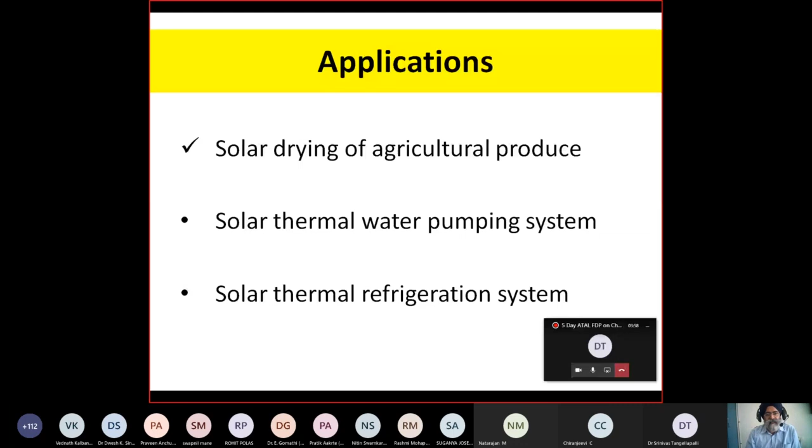Firstly, talking about the solar drying of agricultural produce. I would say it is a necessity to dry agricultural produce because of many factors, like there are very high post-harvest losses. After harvesting, a very large quantity of crop is lost because of improper handling during post-harvest operations, and that also causes food insecurity in Asia and African countries.

Food is also lost in developed countries, but in those countries the food loss is at the consumption stage. Whereas in developing or underdeveloped countries, it happens during post-harvest handling and processing. So that quantity loss of food is quite high, 1.3 billion tons as per the FAO.

The second reason we should dry agricultural produce is because of the ever-increasing population. The population is going to increase, and by 2050 we will need about 70% more food compared to what we are producing now. So there is a demand for more food as well, which can only be met if we are able to reduce the losses. That would be the better way, and there is a lot of scope for handling it better to reduce the losses.

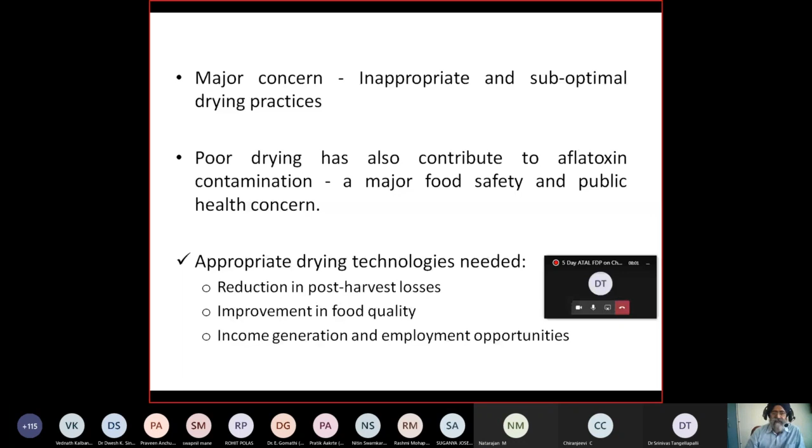So the technologies should be such that they can be used at the villages. Can you kindly go to the previous slide, sir? Just the previous slide. Yeah.

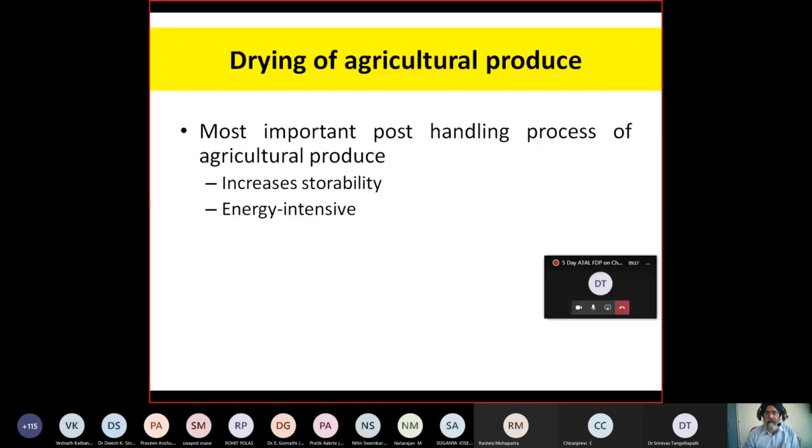Thank you. If the proper drying method is followed, if we process it properly, then we are able to reduce the moisture content of the drying product to a lower, desired value, generally less than 10%. Then its shelf life will increase.

We can store it for more than 1 year. That is the advantage to the processors and farmers, whoever processes the product, because mostly when there is a glut in the market, the price of the product is very low. The farmer can process the product and keep it with him, and since it now has a storage life of 1 year, when prices increase, he can sell the product. That is the advantage of drying.

But drying is a very energy intensive process, as is known to us. How drying is done is a simple method: we supply heat. In most drying processes, we supply heat, and the moisture of the drying product comes to the surface. The air in contact with the product carries the moisture away, the surrounding air moves away, and fresh air comes in. That is generally the drying process that occurs when we dry with the help of heat.

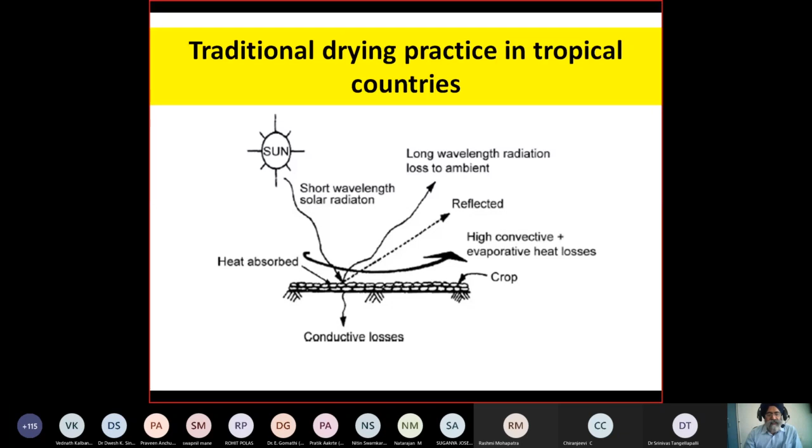Other unfavorable environmental parameters are there too, like dust getting added. Whenever the weather goes bad, we have to collect the produce, and then spread it again when the sun is shining. In the evening we have to collect the produce, and in the morning again spread it. So it is labor intensive as well.

But because of the cost, most farmers prefer open sun drying, since other methods are not available which are as economical, or close to that. The other dryers that we have are very costly.

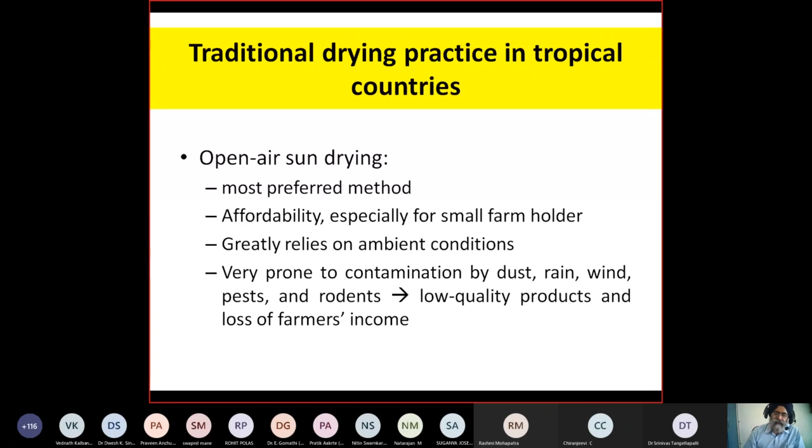The other drying methods we have are electric drying, vacuum drying, that can be done using a vacuum dryer as well. Biomass as a fuel can be used for drying the crops, and heat pump drying is there. All these methods require large amount of energy. They are energy intensive, that is one thing.

And the problem in the villages is that the electric supply is not reliable. That is one thing. Even if we can make a system that consumes lesser energy, the electric supply is very unreliable in the villages. So we will have to shift the system to a place in a city where the electric supply is reliable. That is one thing.

To have the system working at village, we need to go in for such a system, like a solar energy system, where the fuel is reaching every nook and corner of the country, in the villages itself. Only utilization has to be done. Fuel is there. The solar energy is there almost everywhere, at least in India.

And mainly the issue with other systems like electric, vacuum, biomass or heat pump is the availability issue. Because of that, we cannot go in that direction. But these are being done by the large commercial houses. They can do it at a particular place. They can ensure the availability. That can be done by them only. So solar is promising from that point of view, and it is available almost everywhere.

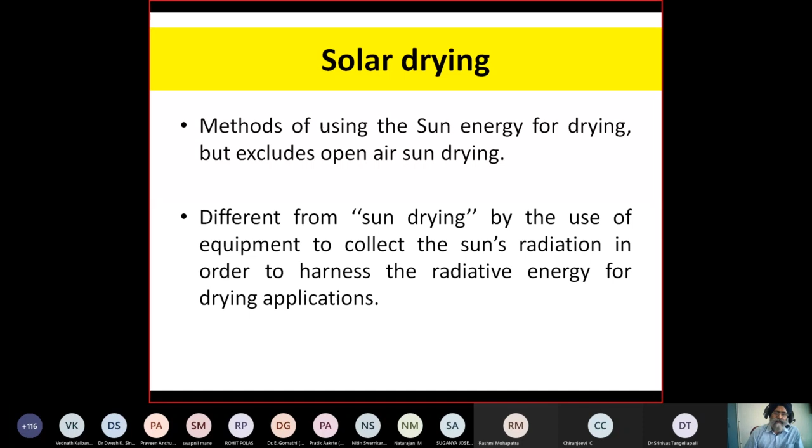It has certain advantages, very large advantages, you can say, as compared to open sun drying. It is faster, it is hygienic, it's healthier. These things are there because the dust and other impurities will not be added, and the shelf life of the dried product will be more because we can dry to a lower moisture content, because we can achieve a higher temperature in the solar dryer.

Product will be dried at a higher temperature, so the moisture content will be lower, so the shelf life will be more. And its operating cost as compared to the mechanized dryers, the electric or vacuum dryers, is lesser. So these are some of the advantages.

A very large amount of work has been done on solar dryers, and there are a number of technically proven designs. The potential is there, the requirement is there, but it is being used at very few locations. Where it has been developed, at that location it is being used. These have not been popularized. There are certain limiting factors, the extension activities, because of which they have not been popularized, because we have not educated the farmers about the use.

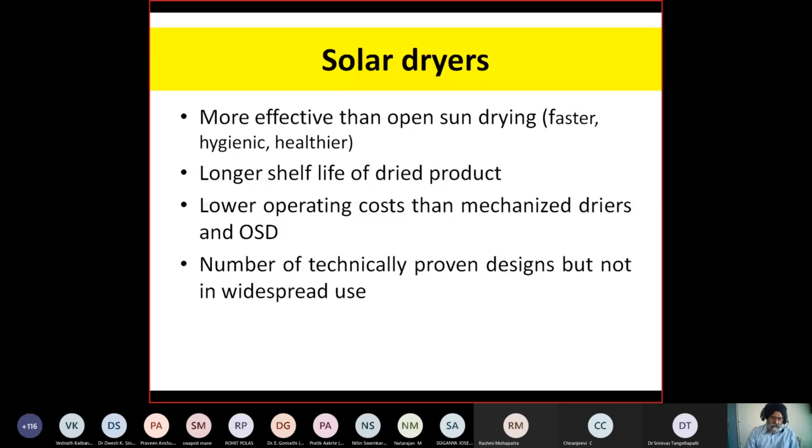And the allowable temperature is maximum up to 75 degrees centigrade, but mostly for fruits and vegetables it is between 50 and 70 degrees centigrade, and for grains it is slightly lesser. So the temperature required is up to 75 degrees centigrade, and this can be easily achieved with flat plate solar collectors. So flat plate collectors seem more suitable for use in solar dryers, because we can easily achieve the desired temperature with them.

And about the components of the solar dryer, basically we have two components. We need to have some arrangement to collect the solar radiation. That is the solar collector. And the other, we need the arrangement to utilize the collected energy.

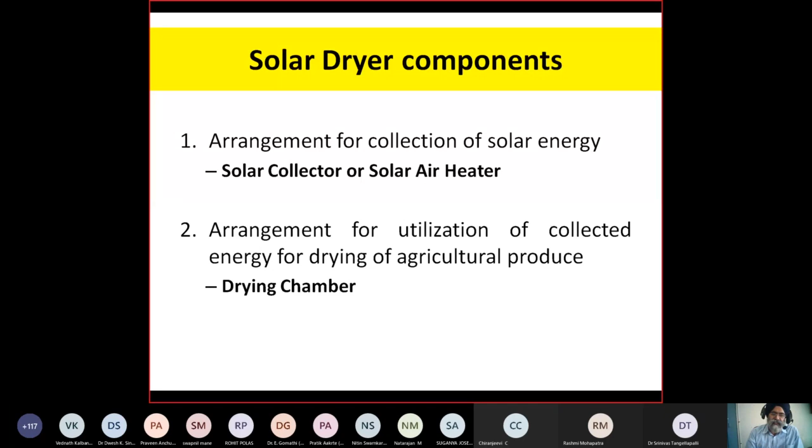So in the solar dryer, the main components are: we have to collect the solar energy and we have to utilize the collected energy for drying of agricultural produce. For the collection of solar energy, we have solar collectors, and for utilization of solar energy for drying, we have dehydration chambers or drying chambers. These are the two main components that would be there in all the drying systems. Additional components may be there, but these are the basic components.

And about the classification of solar dryers, the solar dryer can be classified in three ways. First, based on the collection and utilization of solar energy: how do we collect the energy and utilize that energy? Then the mode of heat transfer: how the collected heat is transferred from the absorber to the agricultural product. And third is the method of air movement, how the air moves.

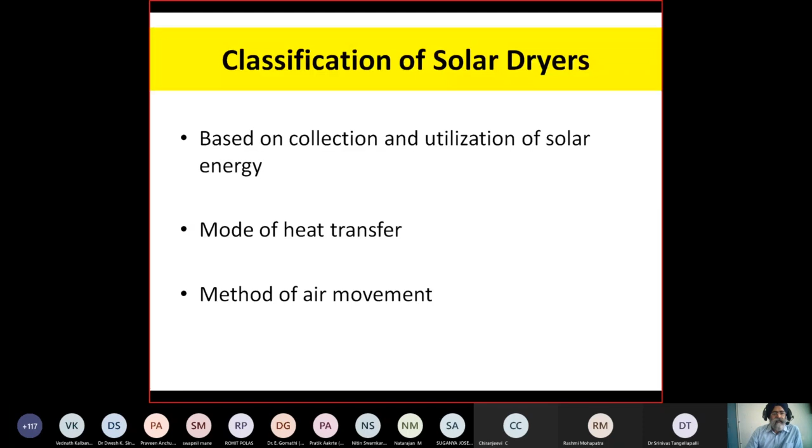Based on the three, first is based on collection and utilization of solar energy. We have seen the solar dryer has two main components, solar collector and drying chamber. And if the solar collector and drying chamber are combined together, then that system is called the integral type of system.

And the other possibility is we can keep them separate, solar collector and drying chamber. So the second possibility is solar collector and drying chamber are separate units. So that is a better unit that is called the distributed type. Here in this case, we can optimize both the units. Solar collector can be separately optimized and drying chamber can be separately optimized, and then they can be combined together. So we have two types based on collection and utilization of solar energy, integral type and distributed type.

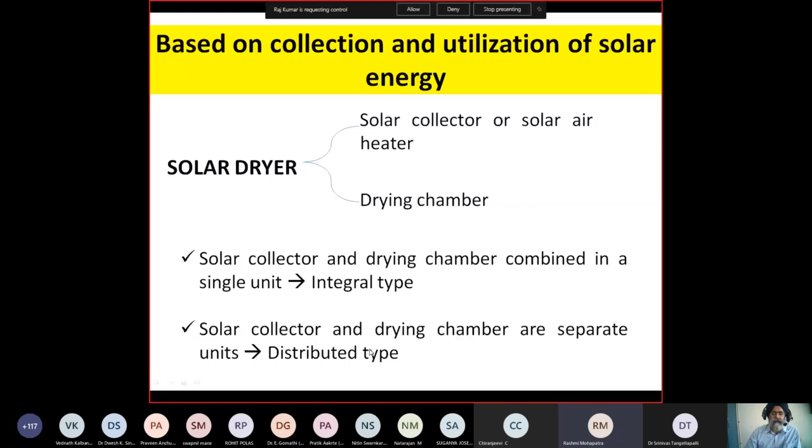Your slide is not visible. Yeah, it's showing. Right. The slide is visible. It's coming, sir. It's coming. Mode of heat transfer. Now we have mode of heat transfer. Is it visible? Yeah, sure?

Sorry. About the mode of heat transfer, we have three types of solar dryers. One is a direct solar dryer, other is indirect, and next we have a mixed mode solar dryer. In the direct solar dryer, the radiations are captured on the produce itself, directly utilized. The produce gets heated and the moisture is removed from the drying produce. And in the indirect solar dryer, the agricultural produce doesn't come in contact with the solar radiation. Hot air is utilized to dry the product. That is indirect utilization, indirect solar dryer. And in the mixed mode, it is a combination of both the indirect and direct mode.

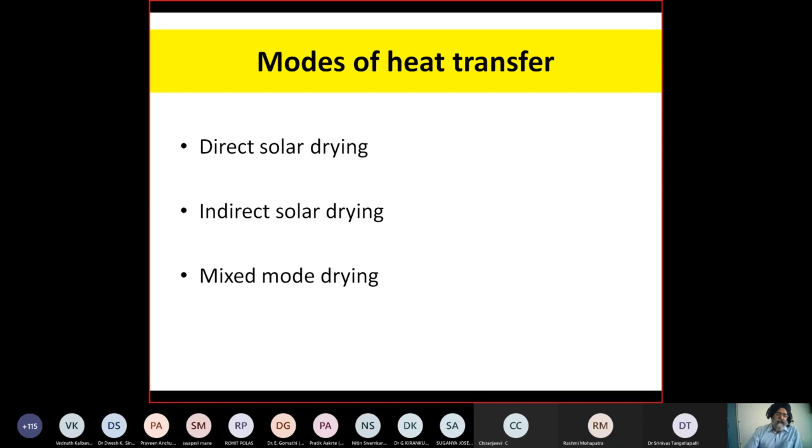And some of the points in its favor or against: it will be of small capacity, because we have to spread the produce and cover it. So the area required will be very large, and we can process a limited quantity of produce at a time. And discoloration of produce will be there. Most of you may have noticed, in the case of red chilies or fenugreek leaves that we call methi, leafy vegetables, if direct sunlight falls on them, their color is affected. But if we dry them under shade with hot air, no discoloration will be there.

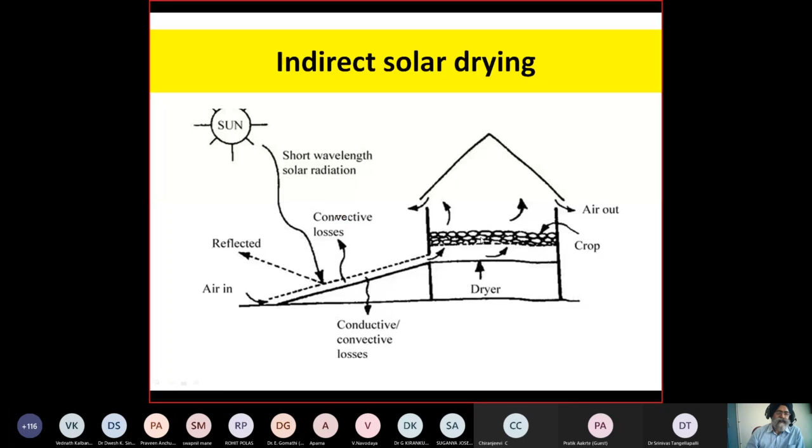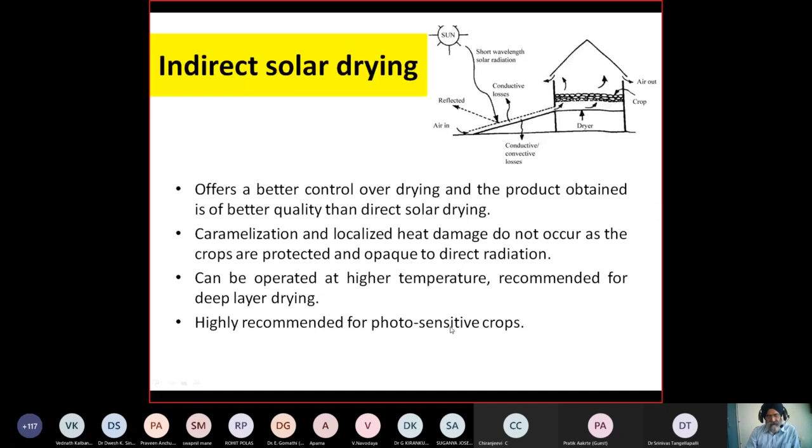And these are some of the points about the indirect solar dryer: it offers better control over the drying, and the product obtained is of better quality than direct solar drying. Localized heat damage does not occur as the crops are protected, and it can be operated at a higher temperature. We can have a large number of solar air heaters so that we get a higher temperature at the inlet to the drying chamber. And it is recommended for photosensitive products that I talked with you about, the red chilies and leafy vegetables. Those will be better dried in this case.

And about the mixed mode solar dryer, it combines the features of both direct and indirect solar dryers. This is a mixed mode solar dryer. Here we have a solar collector, and at the top we have a drying chamber. This is the drying chamber, and at the top of the drying chamber we have a transparent roof. So the product to be dried is placed here. It is getting heat from the solar air heater from the bottom in the form of hot air and directly from the solar radiation as well. So it is a mixed mode. We are getting drying through indirect as well as direct. The two modes are combined, so it becomes a mixed mode.

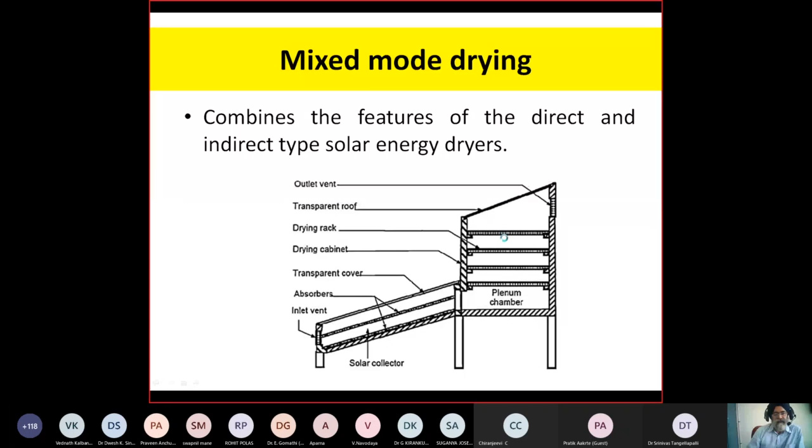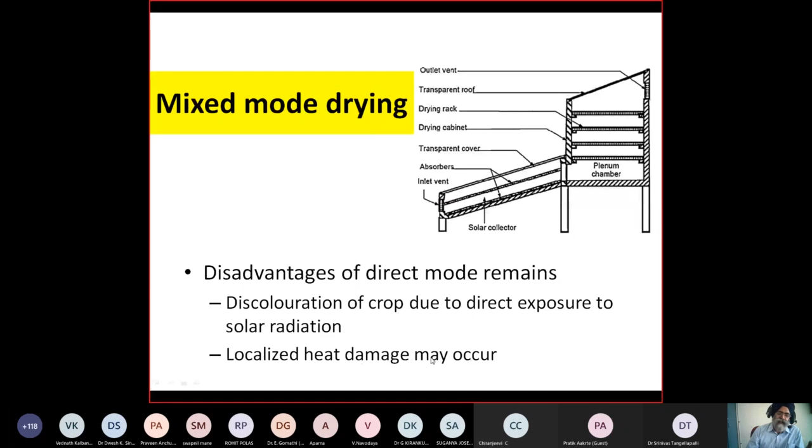Some of the disadvantages. The disadvantages of direct mode remain, like discoloration of crop due to direct exposure and localized heat damage; their extent will reduce, but they will remain. Next is the method of air movement. We can have the air movement through the solar collector and drying chamber naturally by buoyancy, or we make use of an air blower or a pump to force the air from the solar collector through the drying chamber. So these are the two types of dryers: natural airflow or forced airflow. These are also called passive solar dryer and active solar dryer.

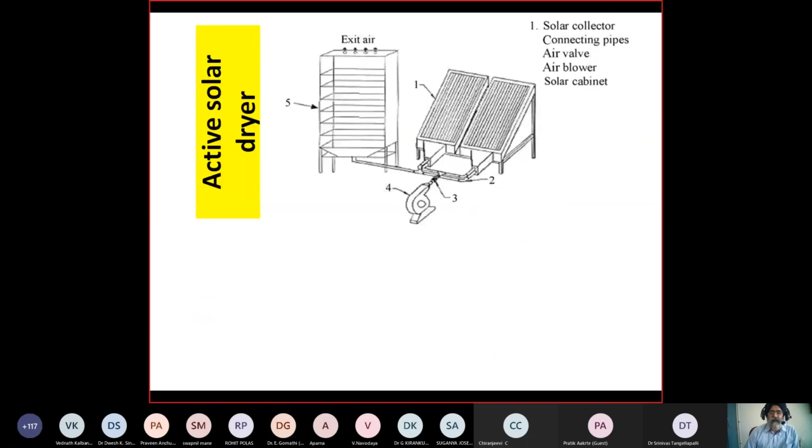And about the active solar dryer, we have to make use of a pump. Here we are making use of a pump and forcing the hot air from the solar collectors through the drying chamber. So this becomes a forced convection solar dryer or active solar dryer. So it can be used for large scale commercial drying.

Sir, one second, sir. Can you show us the previous slide? This one? Thank you, sir. Thank you. Should I? Thank you, sir. Thank you.

So this type of system can be made bigger because we can have a number of solar collectors. So a large amount of air can be heated if we collect a large amount of solar energy, and we can make this drying chamber bigger, or have a number of such drying chambers, and hot air can be supplied to all. So for large-scale commercial drying, active solar dryers are used.

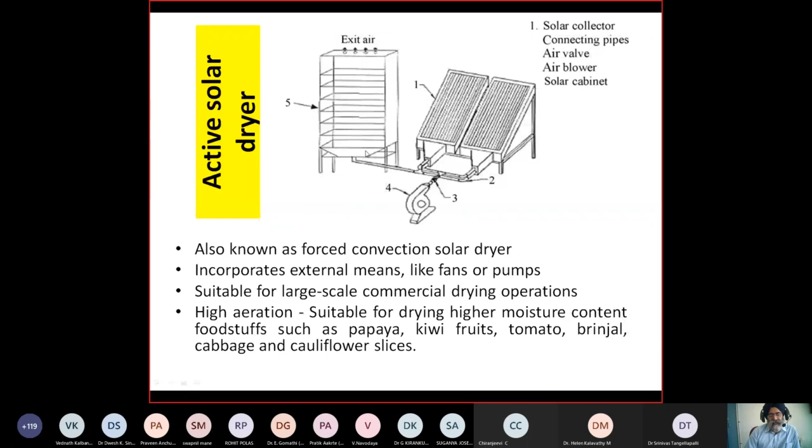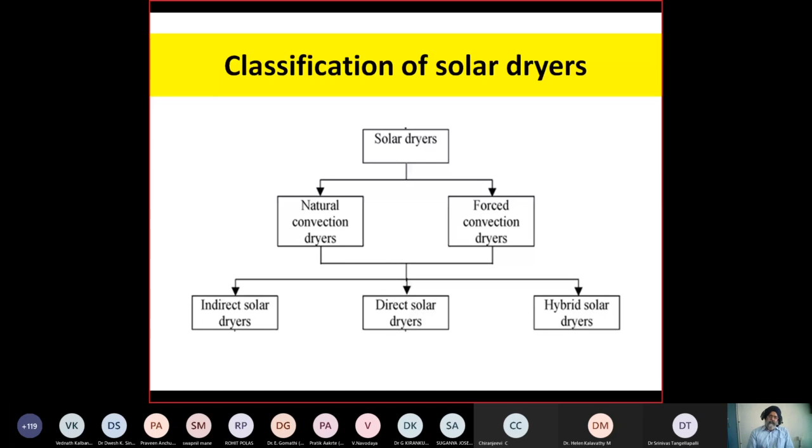So in the end, again, we see that solar dryers can be natural circulation and forced circulation. For natural circulation we can have direct solar drying, indirect solar drying, and mixed mode solar drying, and similarly for the forced convection solar dryer we can have all three, direct, indirect, or mixed mode solar dryers, that we will see in the coming slides as well. I will share with you some studies that have been carried out by people about the natural circulation solar dryer that we have seen.

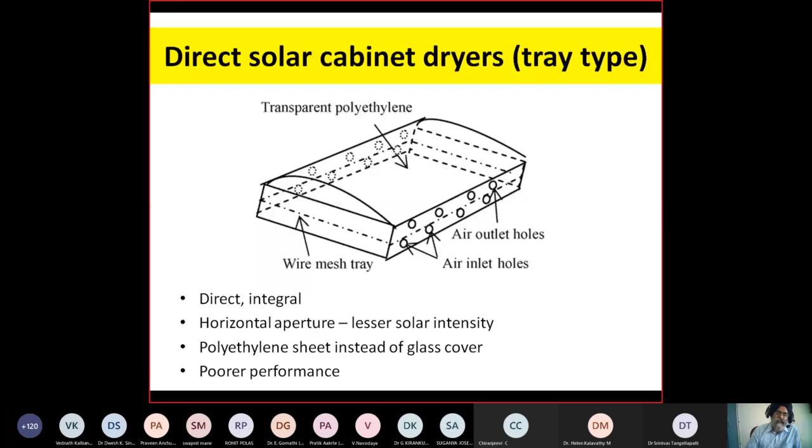Its cost will be less, but the performance at the same time will be poor. The other thing that is not in favor, like I discussed in the previous slide, is the horizontal aperture. So it will intercept a lesser amount of solar radiation. So that is the thing that is not in its favor.

And another system that has been reported is also similar to that. It is similar to a cabinet dryer. We have a tray here on which the product to be dried is placed. There is an opening at the bottom through which air goes in, and a chimney has been provided for air outlet. Because of the chimney, the flow of air will be more.

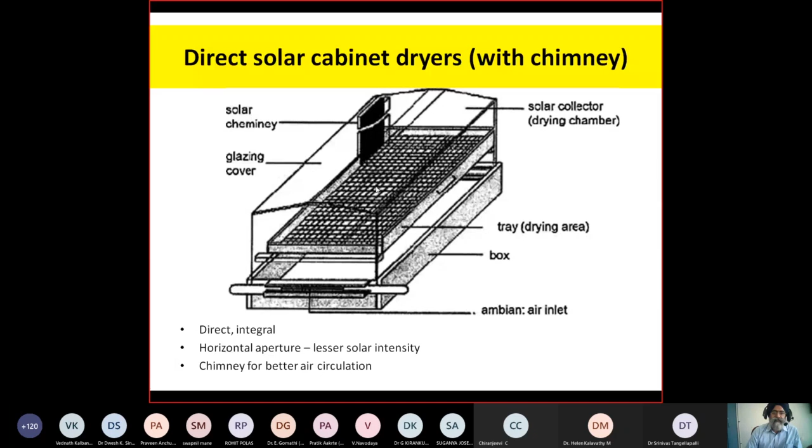So as compared to the earlier dryer, the airflow in this may be better. But again, here we have a horizontal aperture. That is one of the deficiencies that will cause lesser interception of solar radiation.

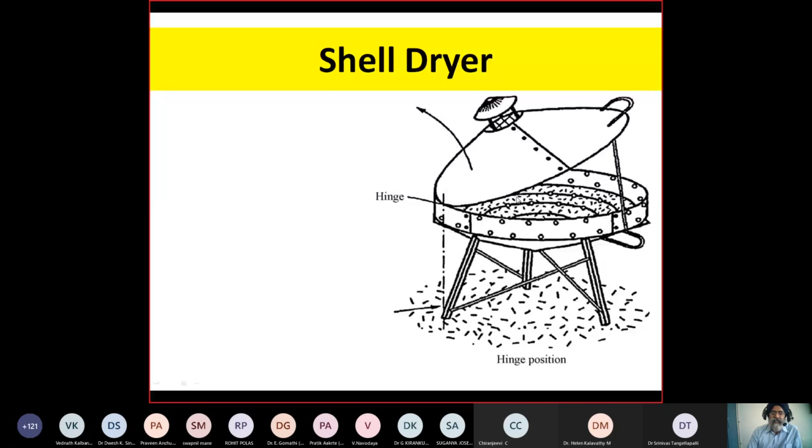And this is another dryer that is popular in African countries. That is a shell dryer. Here we have the top, which is metallic. This is openable. On this metallic top, the solar radiation is absorbed, and on the lower surface we have two cones. One is this cone, and the other is the inverted cone there, on which the product to be dried is placed.

By opening the top cover, we can place the product, and holes are provided on the sides, and at the center an opening is provided for air outlet. Air comes in through the side holes. But in this case, the absorber is at the top. So the hot air will cause the flow of air, but the heated absorber may not transfer the heat to the product placed in the drying chamber. But it will cause a better flow of air.

So this absorber is not being utilized in a proper way, you can say, and at the same time it is an unglazed absorber. It is exposed to wind as well, so the losses from the absorber will be high. So these are the points that are not in favor. So only aeration is happening in this dryer. But this is an indirect solar dryer, indirect and integral.

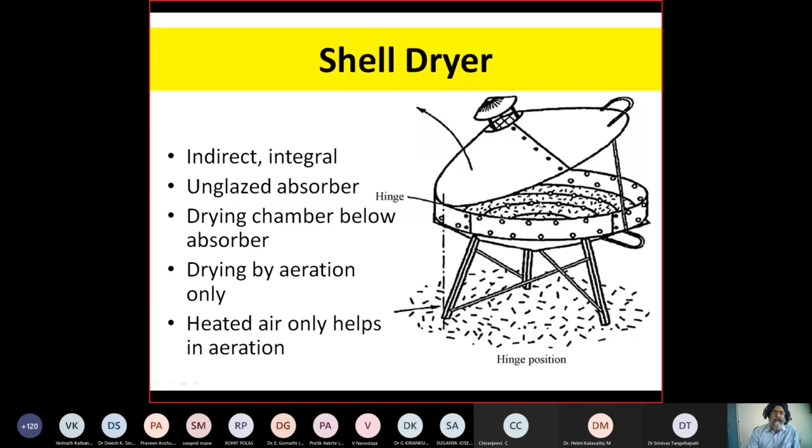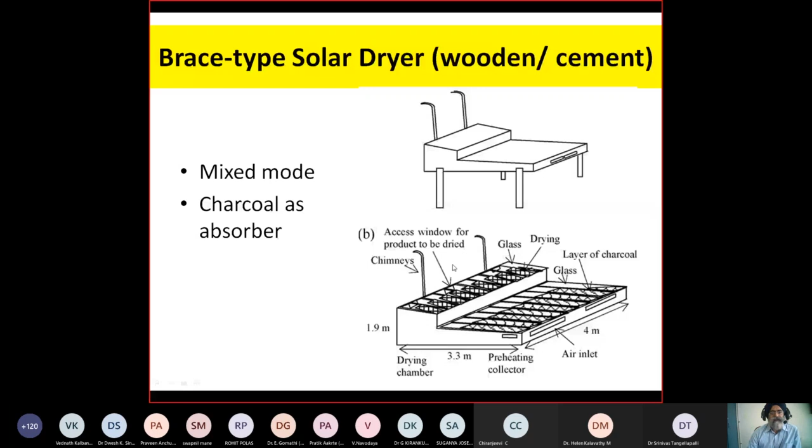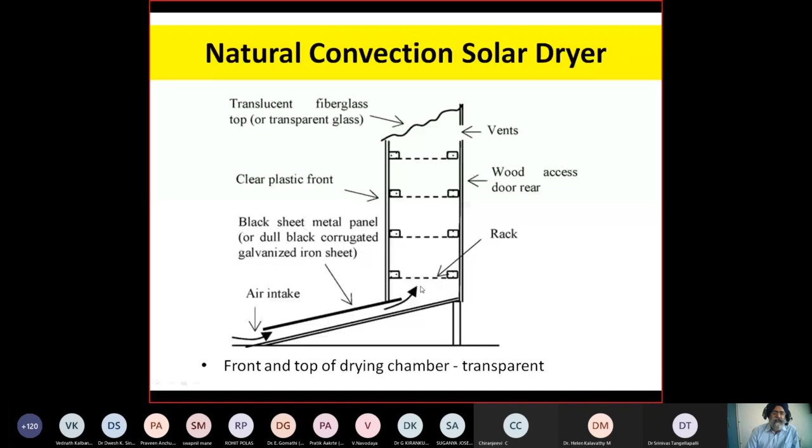And then this is another natural convection solar dryer. These are the small variations that have been carried out by many researchers. This is the solar air heater they are having, and at the top they put the fiberglass sheet for solar radiation input, and on the front side again they have clear plastic sheet for solar radiation input. So this again becomes a mixed mode type of solar dryer. Heat is coming from the solar air heater as well as directly from the solar radiation.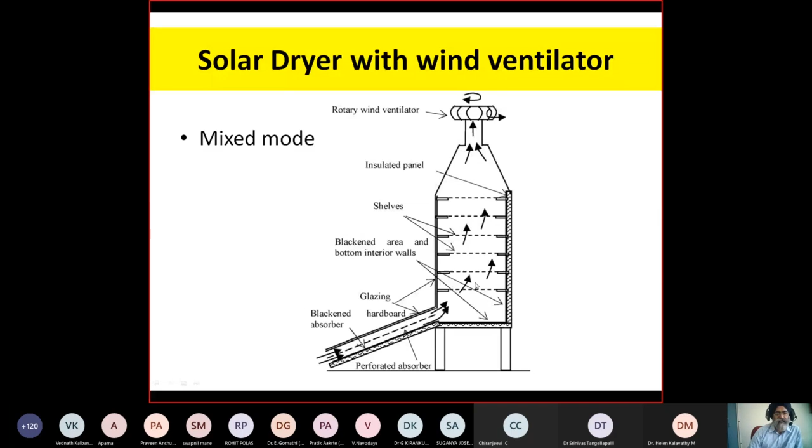Now, this is another solar dryer with wind ventilator. Here, this drying chamber is not fully insulated. It is insulated from one side, the back side, the north side you can say. On the front side, it is provided with glazing so as to allow the solar radiation. So this is another variation that has been done by the researchers.

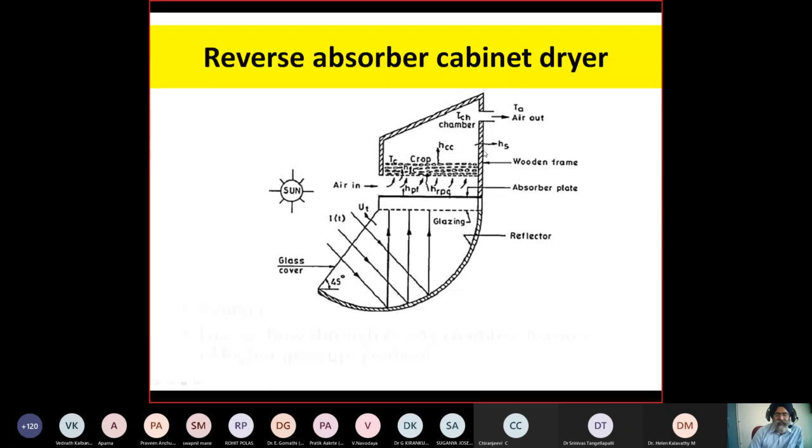What is felt is that in this direction, the pressure drop is more as compared to this direction. It is expected that a very small quantity of air will move up. Some of the air may go out as well, because in this direction the pressure drop is very low as compared to passing through the crop. So here we have a solar collector on the lower side, and that is why it is called the reverse absorber.

Then next, coming to the greenhouse type solar dryers.

This is a simple greenhouse type solar dryer. Here we have two platforms on which the product to be dried is placed on the two sides, and it is covered with the glass roof. At the top center, an opening is provided for air outlet. Air coming in from the lower side may pass through the drying product and leave at the top, or it may bypass the product placed on the drying platform and go directly upward. That may be an issue, since the air gets heated but bypasses the product, so hot air doesn't come in contact with the product to be dried.

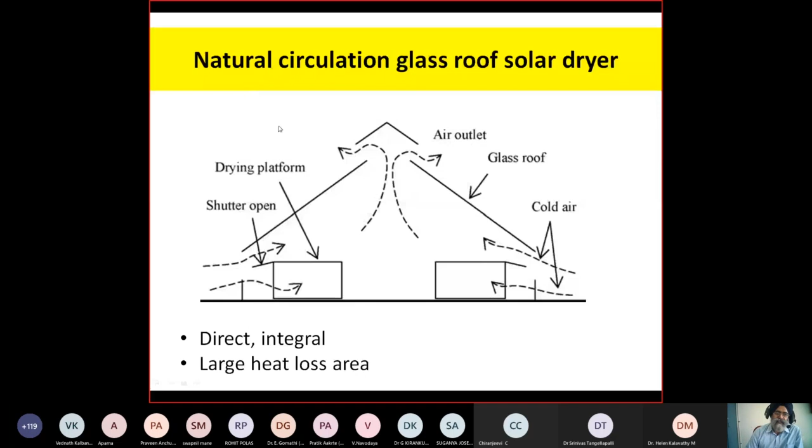So this is another type of greenhouse that was developed by some author. It is simple - the platforms are placed in the greenhouse and it is covered with a plastic sheet. The plastic sheet generally used is UV stabilized, which can withstand the environment for about 5-6 years.

Here again we have a problem of high heat loss area, because most of the radiation comes from the south side, a small amount comes from the east and west side, but no radiation comes from the north side. So that large area on the north side contributes only to heat loss.

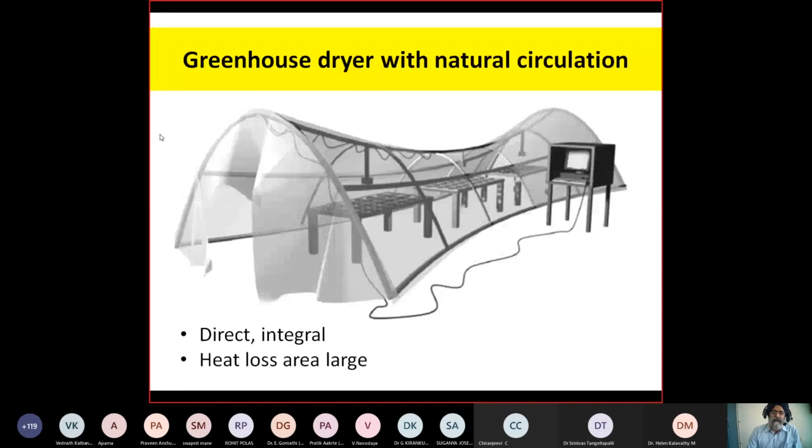These are other designs that have been made - this is again a tray type, or here it is a rack type of solar dryer. Number of racks are there on which the product to be dried is placed. Again, in all these cases, the disadvantage is large heat loss area, and we are allowing excess area on the north side as well, through which no radiation is coming.

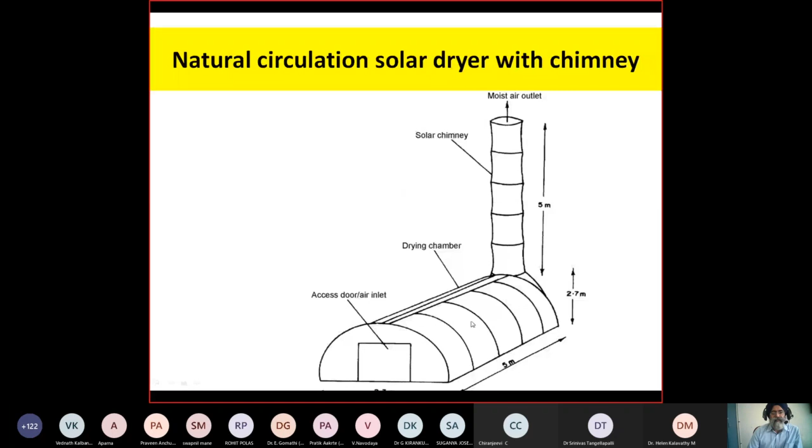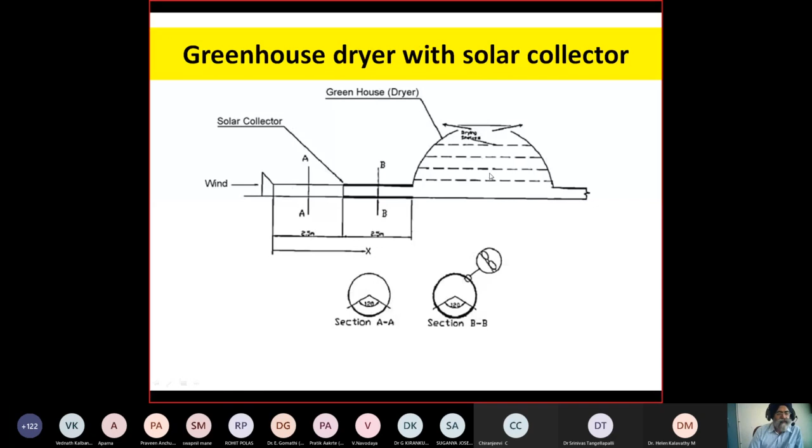And then we have forced circulation solar dryers, also called active solar dryers. There are few designs that I will discuss with you. This is the simplest design of a forced circulation solar dryer.

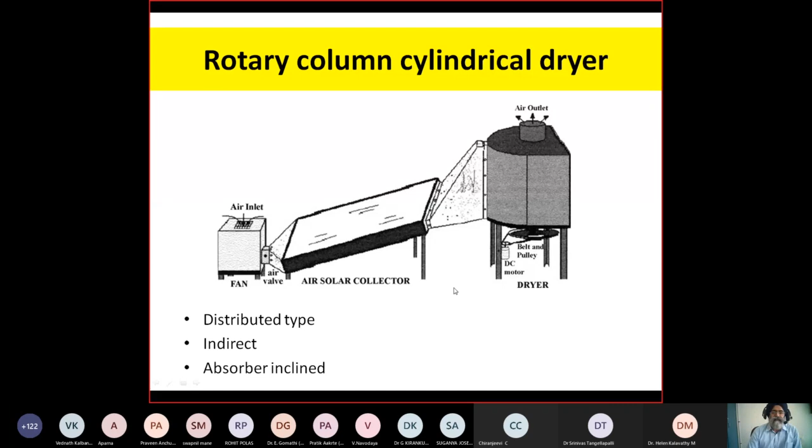And then we have a rotary column cylindrical dryer. It is almost the same as compared to the earlier one. We have an air blower and then a solar collector, which is inclined at a certain angle, and then this is the cylindrical drying chamber, which is rotating continuously with the help of a motor, and hot air enters the drying chamber and leaves at the top. This is generally used for grain drying, like if we have to dry maize or paddy.

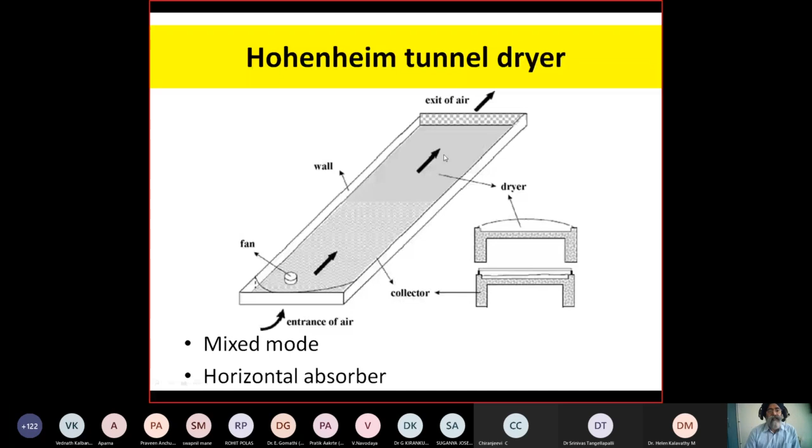And it is similar to the earlier one. We have some portion marked as the solar collector, and then we have a drying chamber where the drying product is placed. Air comes in from this side, and we have an air blower here, and air goes out from this side. So air is heated initially and then passes through the drying chamber and then leaves. This is a mixed mode type of solar dryer.

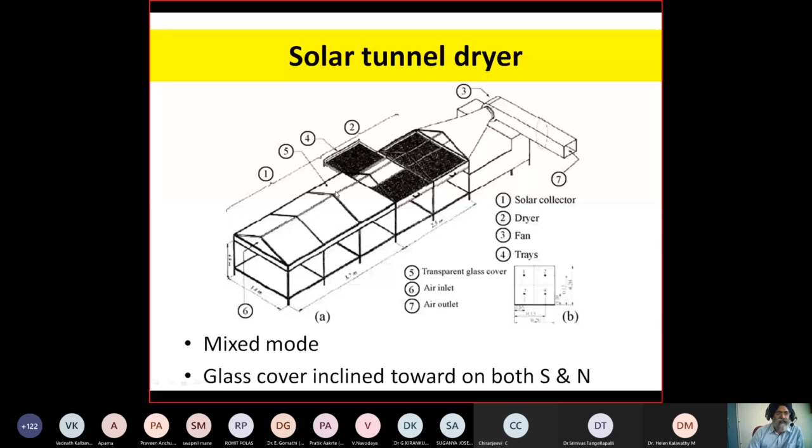These were the simple type dryers, natural circulation or forced circulation, and then greenhouse dryers. Then some people have tried solar dryers with heat storage. Heat storage is done when we want to utilize the solar radiation collected during off-sunshine hours, so we can extend the drying hours.

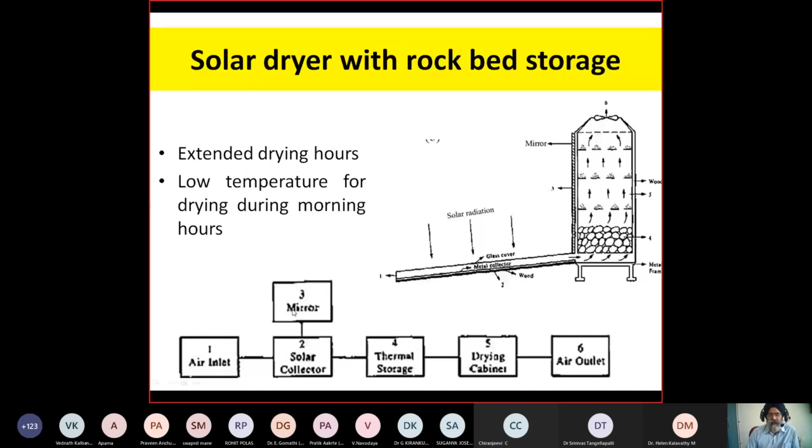The advantage is in the sizing - how we size the rocks and how we size the solar collector - that has to be done so as to take proper advantage of the heat storage. So this is the cycle. Here they have put a mirror as well, so as to concentrate the solar radiation onto the collector, so that the temperature rises to a higher value. So this is the general circuit: air inlet, then passes through the solar collector, heated with mirror as well as solar collector, then thermal storage, drying chamber, and then leaves.

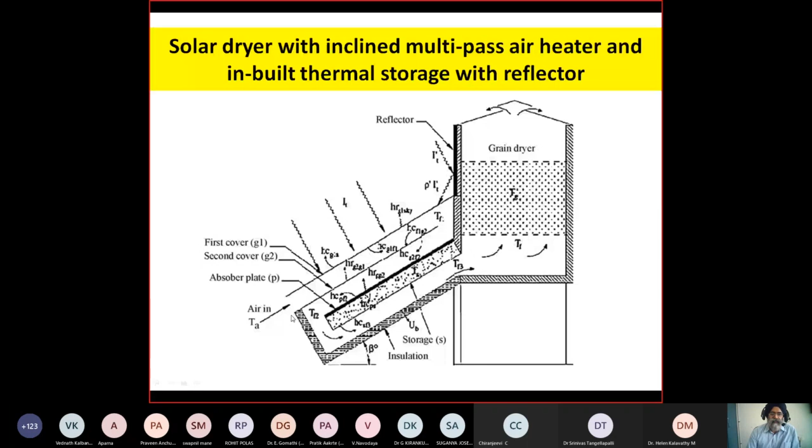This is the storage that I placed. Some of the heat will be gained by this storage. Here in the front, we have glass windows they have provided so as to allow the radiation to pass. So it is a mixed mode type of solar dryer.

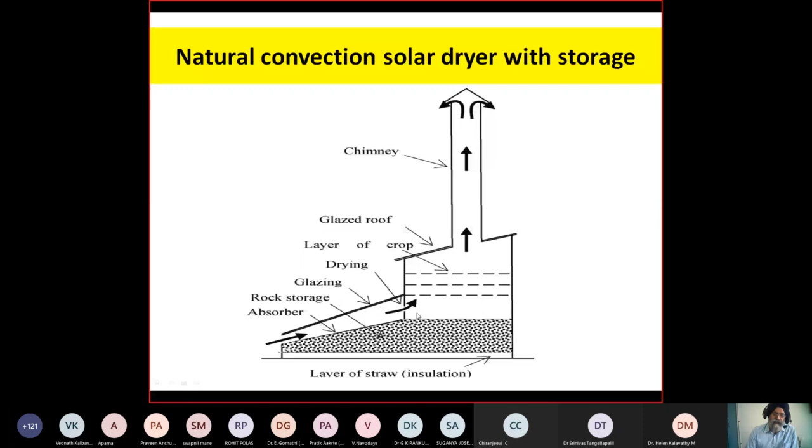And then another possibility is solar dryer with thermal backup. The advantage of solar dryer with thermal backup is that we can get assured drying, like if we use electric drying as compared to the solar dryer. In solar dryers, because of the weather condition, the temperature may drop sometimes because of cloudy weather. But if we have a thermal backup, that thermal backup will come into picture and increase the temperature to a desired value.

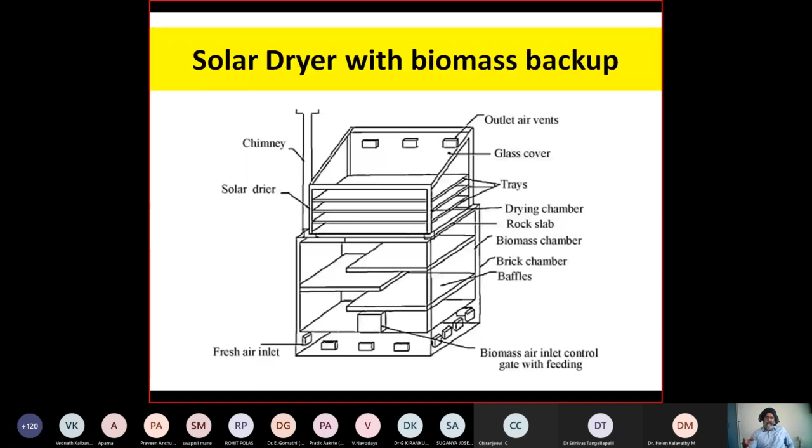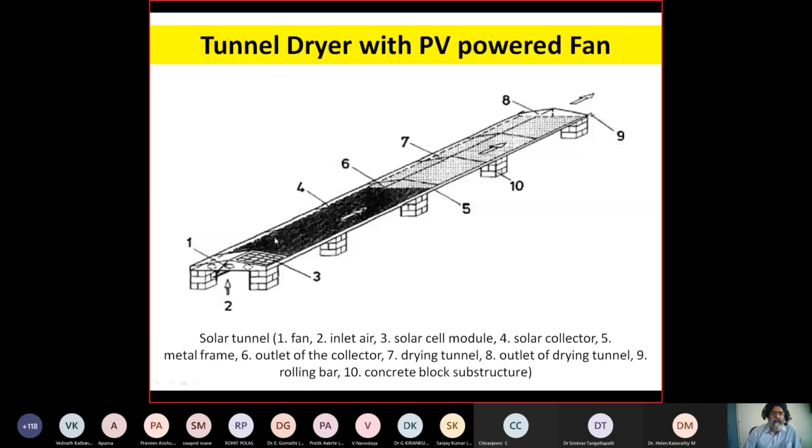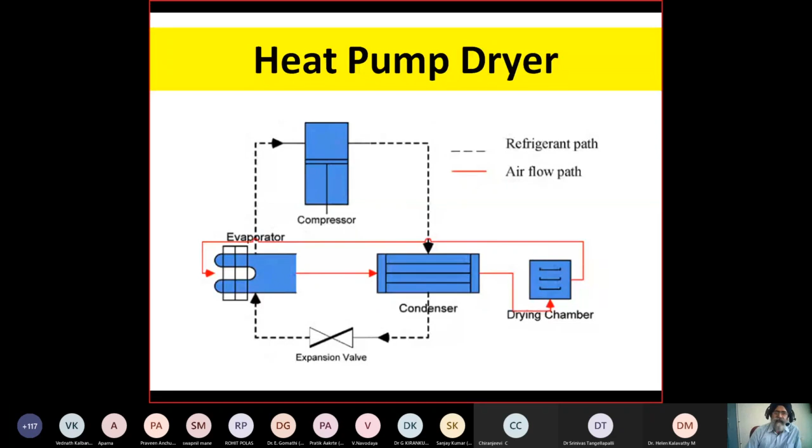We have the heat pump as one circuit, and the other circuit is an air circuit in which we place the drying chamber. And this heat pump dryer can be powered with solar energy as well, a heat pump assisted solar dryer. This is the circuit we have for the heat pump: the compressor, then condenser, then expansion valve, and then evaporator. And this is the other circuit.

But the economics is not favorable in this case; although the drying will be faster, the economics is not there. And then we have a desiccant integrated solar dryer. This is another solar dryer in which desiccant is used. A desiccant, as you may understand, absorbs the moisture in the surrounding air.

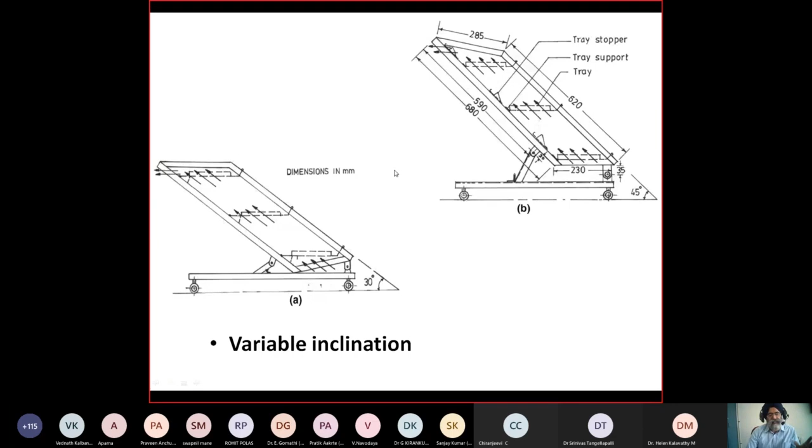Here one advantage is its inclination can be changed. Like we have provided these tray stoppers. With the tray stoppers, we can change the inclination depending upon the latitude. So if we are using it at a different latitude, we don't have to make a different dryer. We can use the same dryer and, with the help of these stoppers, like in this position or in this position, the inclination of the dryer can be changed by 15 degrees. The tray remains horizontal in both the cases. That is the advantage. So that is one factor in its favor, that it has a variable inclination depending upon the latitude of a location.

The another thing is on the drying tray, we have a shading plate that can be put on the drying tray. Like for the photosensitive products, we need to have shade on the drying product so that only the heated air passes through the product. Drying is carried by heated air and no direct solar radiation falls on the produce. Shade is there on the product. But the drying is faster if the solar radiation falls directly on the produce.

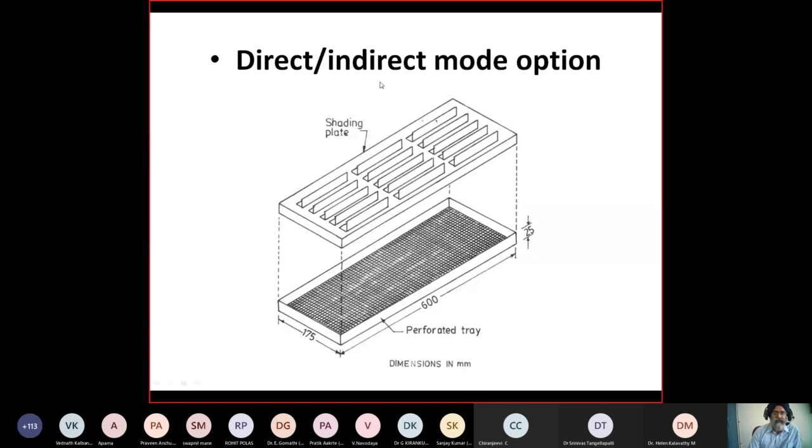Like if we have to dry turmeric, ginger, in those cases, the quality is not affected by direct sunlight. So in those cases, we can remove this shading plate, only this tray is used, so that drying is faster. So we have an option to dry in direct sun as well as indirect mode. And then it's mounted on a wheel so that we can store it in a room when it is not used.

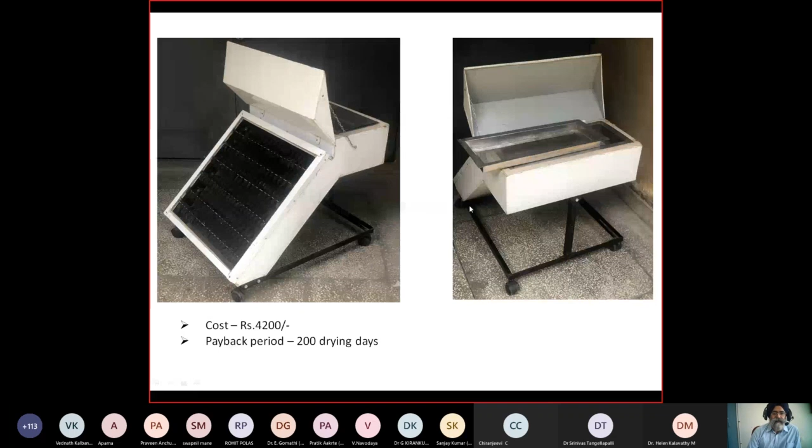And then there is another design. It is also a small design that we have recently made. It is of the same capacity, 2 to 3 kg. Here we have a solar collector at the bottom, and at the top we have a drying chamber. Like this is the drying chamber we have, and there are 2 trays. And these dryers we are selling through our department as well. These are being sold.

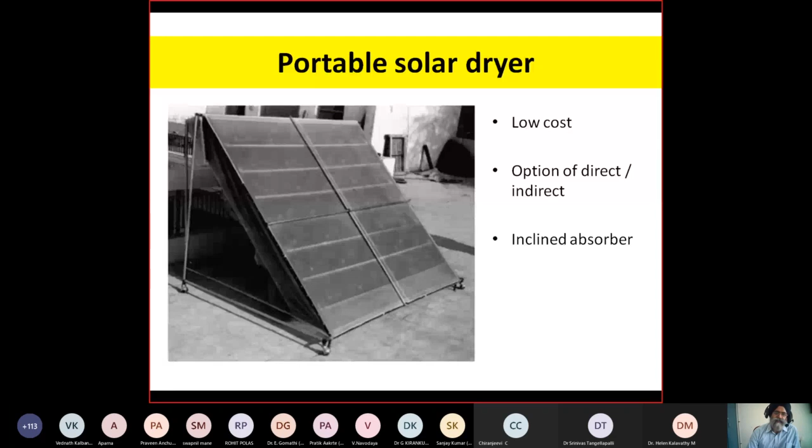And then in the medium capacity dryer, this is one dryer that is very low cost. It is made of a plastic sheet. It has inclined absorber. It has plastic sheet on the front as well as on the back side. It is made of plastic with insulation of thermocol. We have a number of trays, around 7 trays, on which the product to be dried is placed. And it is made in such a way that it can be dismantled when not in use. We can dismantle it entirely and store it, and when it has to be used, it can be again assembled, because generally for farms it is not used throughout the year.

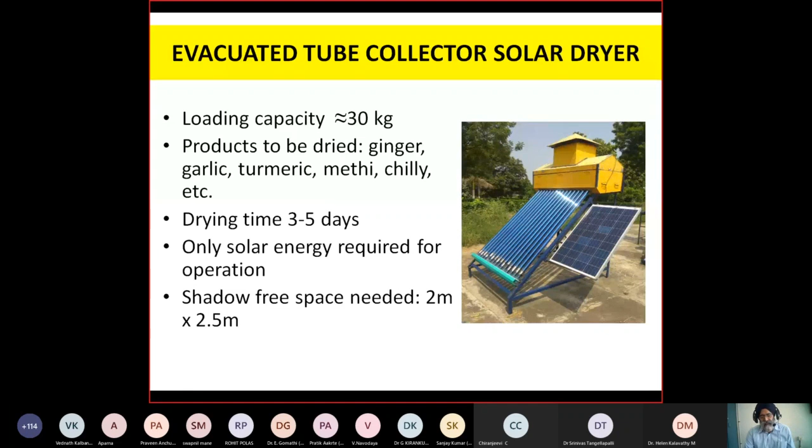The evacuated tubes have very high efficiency; evacuated tube solar water heaters have efficiency of around 50 to 60%, as compared to flat plate collectors, which have efficiency in the range of 30 to 40%. So because of higher efficiency, we can get higher temperature and the drying is faster. And this is another view. This is the view that when not in use, it can be pushed under the evacuated tubes.

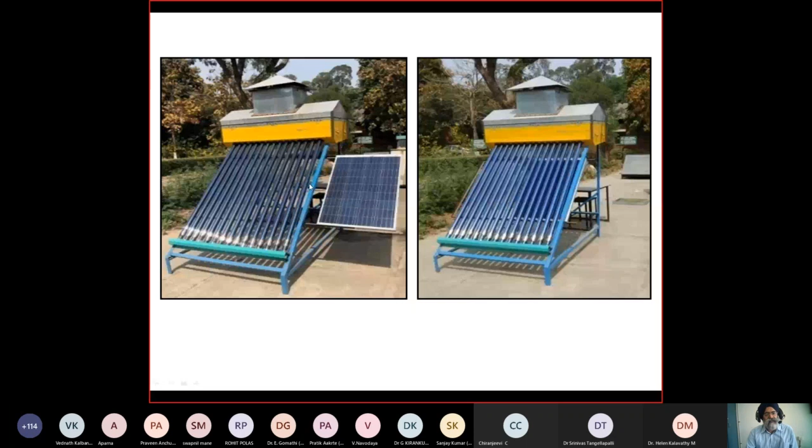And the advantage here in the case of evacuated tubes is that they remain almost normal to the sun throughout the day, because for the evacuated tubes, the direction of the projected area will not change, because they are cylindrical in shape. The interception is much more as compared to that of the flat plate collector. And its efficiency is quite high.

We have even tested the quality parameters, the food parameters like chlorophyll content, ascorbic acid, color for the fenugreek leaves, and they were found better. And similarly for turmeric, we tested the polishing loss, recovery of powder, curcumin content, volatile oil content, color. They were found to be better for this dryer as compared to the other dryers.

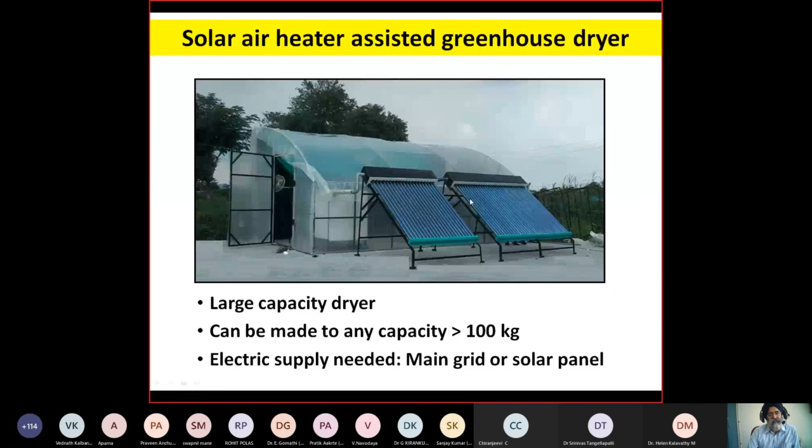Even without solar air heaters, because of the insulation of the north wall, we are able to achieve quite a higher temperature as compared to the general greenhouse. With this, we are able to get around 30 to 35 degrees centigrade higher temperature than the ambient temperature.

Now in this case, we have air recirculation. These solar air heaters suck the air from the greenhouse, heat it, and then supply it to the greenhouse. So there is air recirculation. So continuously the temperature of the air inside the dryer continues to increase.

And exhaust fans are used only when the inside humidity increases above a limit we have set, 55%, or if the temperature in the greenhouse exceeds 65 degrees centigrade, then the exhaust fans are switched on. Otherwise, there is no heat loss to the surroundings. Continuously, there is no heat loss. That is the advantage in this case.

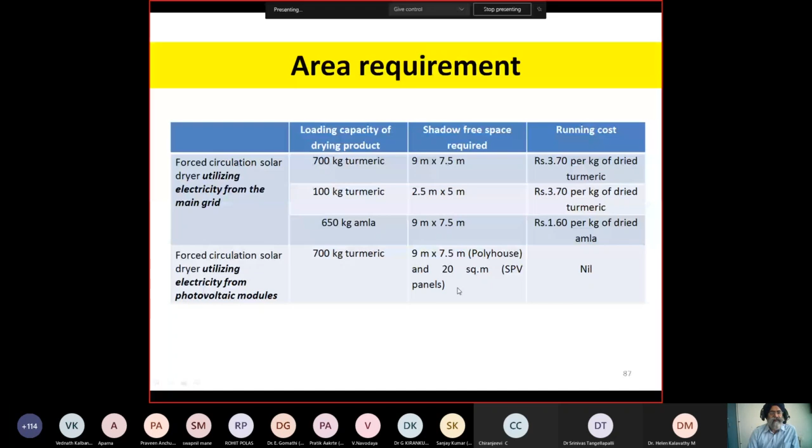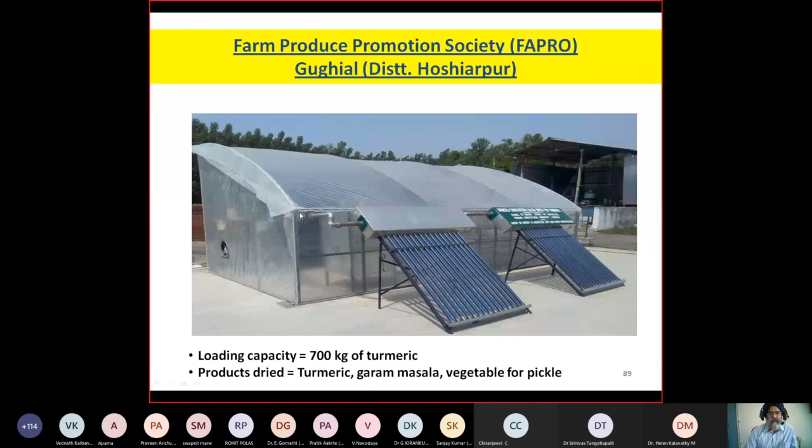And then I will just briefly go through the salient solar dryer installations that we have done. Like this is the solar dryer installation at a society. They are using it for drying of turmeric, garam masala and vegetables. For pickles that need to be dried, they are using that. And this is of 700 kg capacity. And then this is another dryer that is of the same capacity.

And then we have a honey moisture reduction system using desiccant. This we developed about 10 years back. Generally for honey, when the honey is harvested, its moisture content is in the range of 23 to 25%. That needs to be reduced for a longer shelf life. Otherwise, it will ferment. So the moisture content needs to be reduced to below 17% so that it can be stored for a year and longer.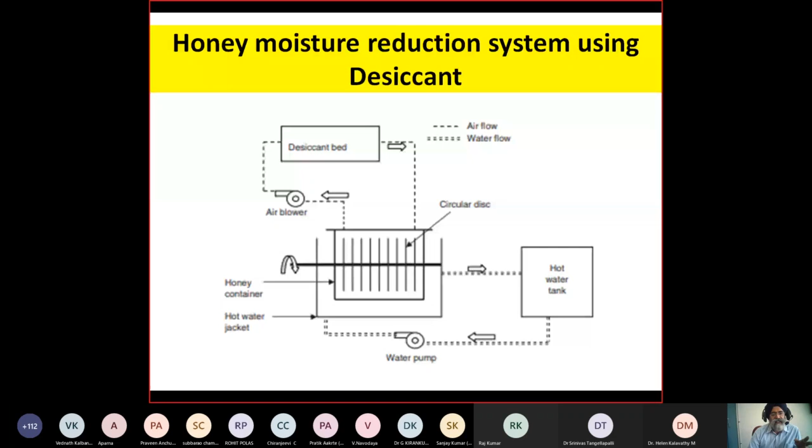And the honey was heated by putting it in a hot water bath, and that water was circulated and kept at a temperature of around 44 degrees centigrade, because we cannot go to a higher temperature beyond 50 degrees centigrade. Otherwise, the quality nutrients of the honey will be destroyed. That is the system. This is the honey chamber. These are the discs you can see.

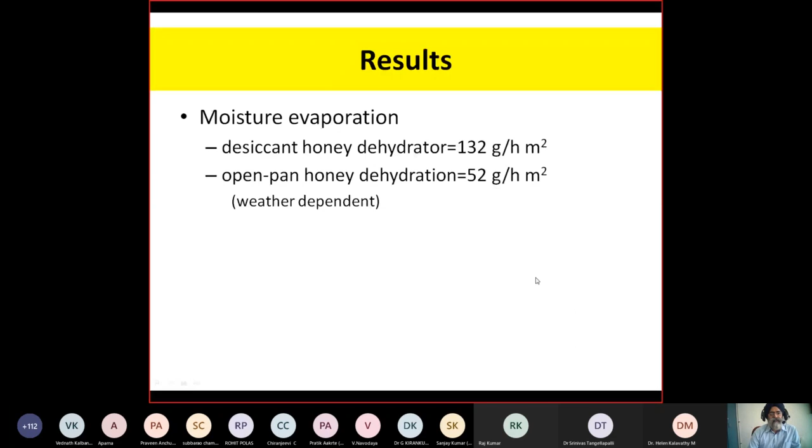And then this is another system, small scale honey. Here we have streams. This is the honey chamber. This is honey flowing in the form of streams, and we are flowing hot air over the streams for the removal of moisture. This is a simple system, and honey is heated with the help of a hot water bath, which is maintained at 45 degrees centigrade. This is a tray for honey streams, and these are the photographs you can see for the honey streams.

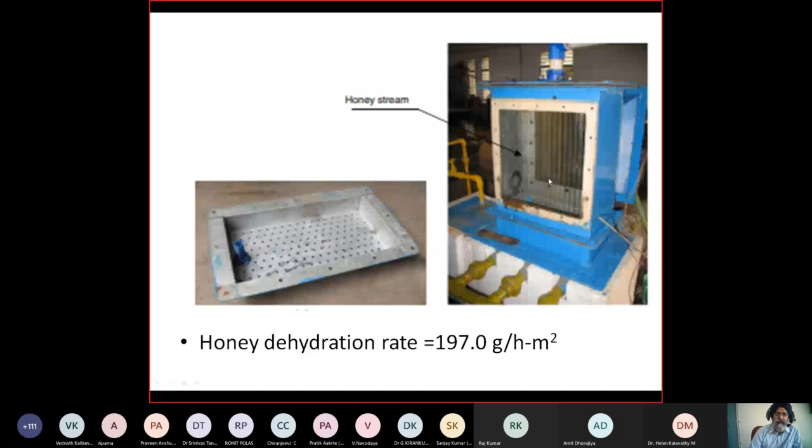And this is another arrangement for seed drying. For drying of crops, we can go to a temperature of around 60-65 degrees centigrade or 70 degrees centigrade. But for drying of seed, we cannot go to that temperature. The germination of seed is affected. We cannot go beyond 45 degrees centigrade. If we go beyond that, the germination of seed will not be there. So seed have to be dried at a lower temperature.

If we are to dry at a lower temperature, we dry with low humidity air. For that we make use of desiccant. By passing the air through the desiccant, we get the low humidity air. That low humidity air is passed through the seed bed, and that is circulated throughout the day. In one batch, this seed will get dried and this desiccant bed will get wet. Then that desiccant bed has to be regenerated. The moisture from the desiccant bed has to be removed.

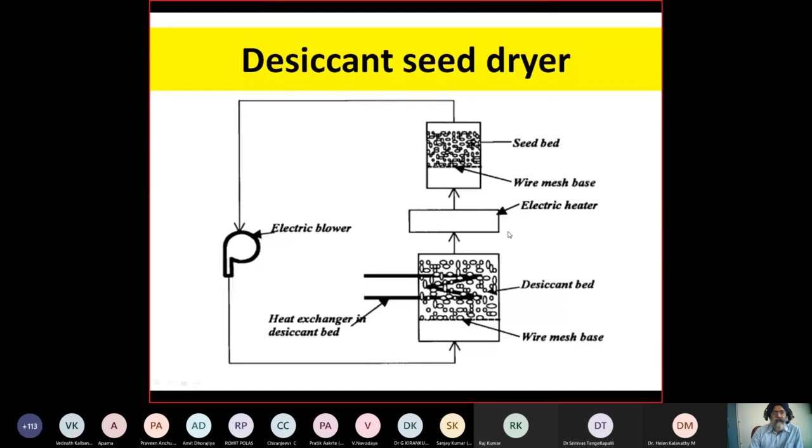That is removed with the help of solar air heaters by forcing hot air from the solar air heater through the desiccant bed. The moisture of the desiccant is driven out, and then it gets ready again for drying. That regenerated desiccant is again used for drying the next batch of seed. So that is a desiccant seed dryer. This is another type, an inversion of flow desiccant seed dryer.

Then the other applications, the small applications that we discussed at the start, are solar thermal water pumping systems. These are there, but the economics of these systems is very poor. Water pumping is based on the Rankine cycle. This is the Rankine cycle. We have a boiler. From the boiler, we go to the expander. From the expander, the power is used for the water pump. And from that, it goes to the condenser and boiler.

This is the circuit we have. The expander supplies the power to the water pump. In the boiler, we require heat. That heat is supplied from the solar collector to the boiler. So in this way, the solar energy can be utilized for water pumping.

But this system is very costly. We will have to put a large number of solar collectors, and they are not able to compete with other energy devices like photovoltaic and even electricity. It will not compete. So not much research is going on in this direction.

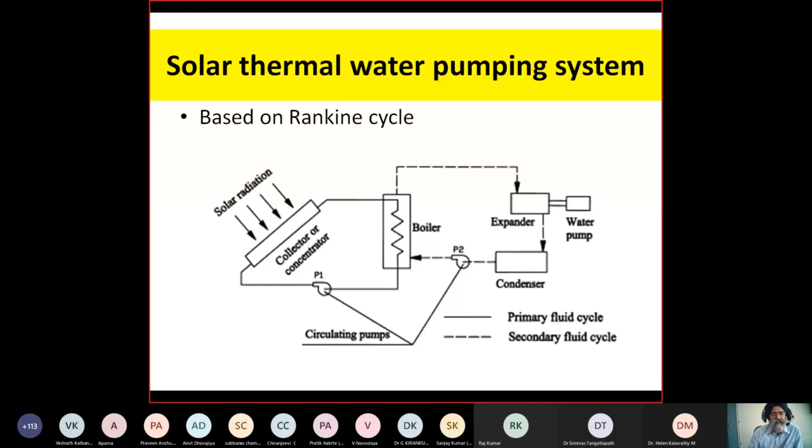Another system that we have is a solar thermal refrigeration system. Some of these systems are being used, and the simplest cycle works on the absorption refrigeration system. This is the generator where we have an absorbent and refrigerant combination, and the refrigerant goes here in the condenser, and then we have an expansion valve, and then this is the evaporator where cooling is done.

Here the absorbent from the generator and the refrigerant get mixed. This is the absorber, and that mixture again comes to the generator. In the generator we need heat. That heat is supplied with the help of solar energy. We have a flat plate collector array, from where we can supply heat to the generator for the separation of refrigerant and absorbent.

The refrigerant will go. But because the absorption system has a very low efficiency, and the solar system will also not work throughout the day, this technology has also not picked up much. It is all in the research stages. The only potential that we see today is in solar drying.

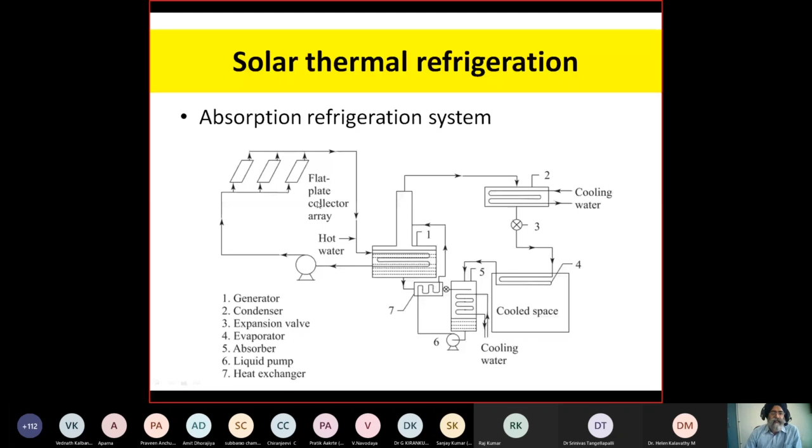Thank you, sir, for your interesting presentation on solar thermal applications in agriculture. You elaborated on various solar drying methods, including direct, indirect, and mixed, and also some latest techniques like heat pump and desiccant integrated solar systems, and you highlighted experimental works as well as case studies at Punjab Agricultural University, Ludhiana, and other places like Hoshiarpur. In addition to solar drying, you also briefed about solar pumping, solar refrigeration, etc.

If time permits, maybe one or two videos we would like to watch in the field of solar agriculture. There are a lot of videos on YouTube on solar drying systems. Maybe at least one video you may play to our participants. It's my request. Please unmute your mic. Please share the screen, sir. Should I share the screen? For video. Kindly play one video, sir. Should I play the video? Yes. Okay.

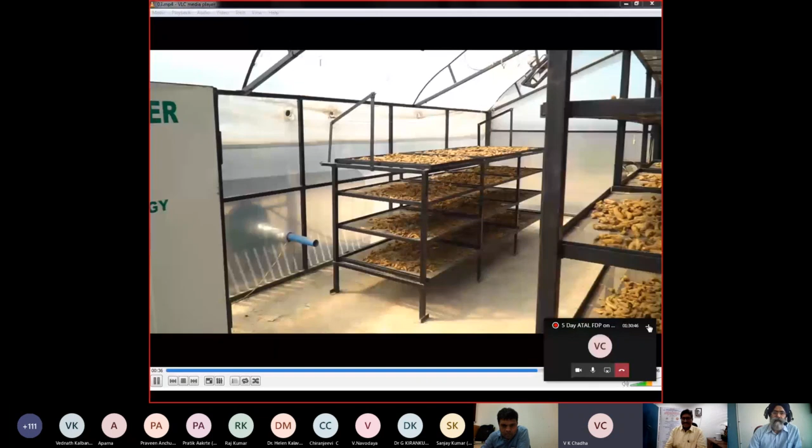Doctor, I really appreciate the great effort, and we came across a variety of solar dryers. My only concern is the design effort. Who's making it, is it at the university level? These have been designed, and now the technology has been transferred to a private manufacturer. Who are the people responsible? How much time does it take to make a prototype, and for its acceptability and application?

Like I have shown you this bigger dryer, up till now he has installed it at around 15 locations. Your transfer of technology takes place in which form? Design or drawings? Is proper design or prototype copying taking place? It is both ways.

We even guide him, giving him the drawings, guiding him for manufacturing of the dryer to ensure proper quality of the product is manufactured. We even visit the site for initial dryer installations.

That is done, because it's a big effort. This manufacturer has even installed the dryer at Dehradun, and now he is installing at further places in Uttaranchal and Leh as well. Now we are quite happy, sir.

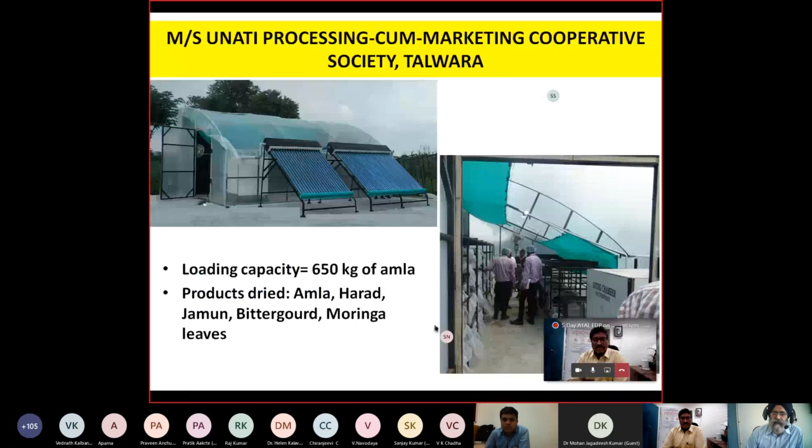Sir, one more question from the chat box. One participant is asking what is the refrigerant used in the heat pump? You showed some heat pump-based solar dryer - what type of refrigerant do they use? What is the name of the refrigerant being asked about for the heat pump dryer?

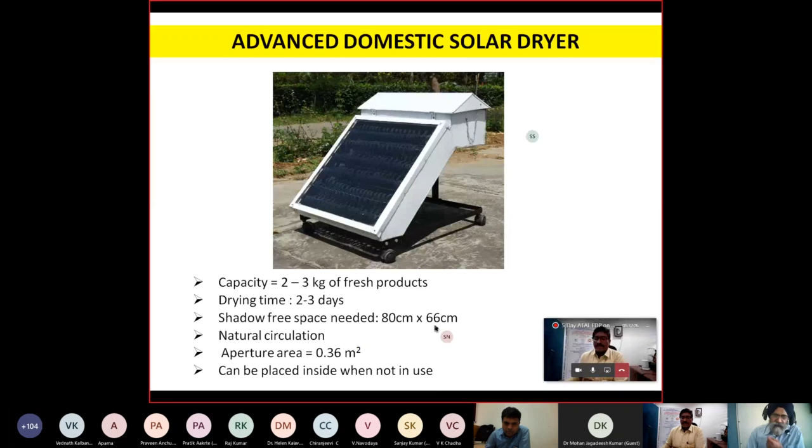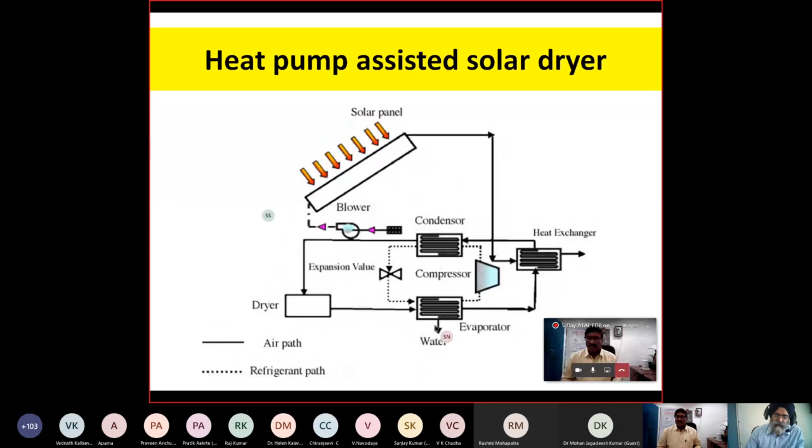Can you repeat that question? What is the name of the refrigerant used in the heat pump? I think it was R133 or something like that - exactly, I don't remember now, because this is not the system that we developed. It is a system available in literature that I am showing, so I don't exactly remember which refrigerant it was. Okay, okay.